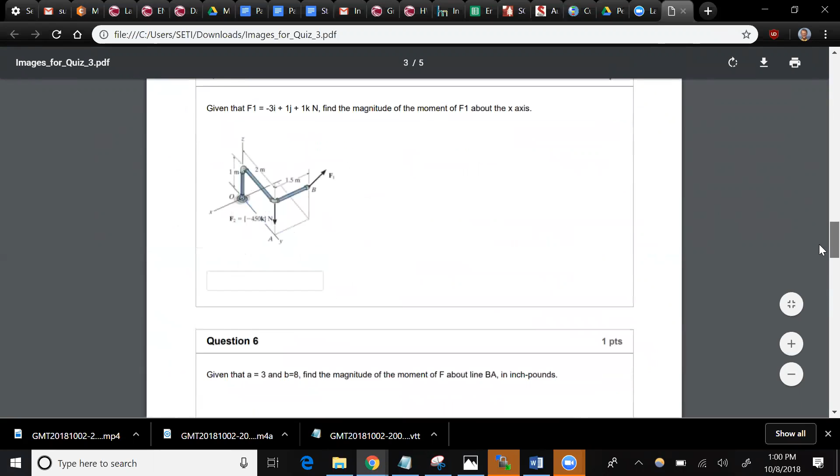So this is the email in your mailbox. Question. I don't want to give too much away because I want you to think about these things, right? But go ahead.

In the force vector, it's a j hat minus b k hat. Yes.

I got this answer by doing all the work just normally, and I marked it wrong, so I went back and checked it. I couldn't find what I did wrong. Okay, and I used a plus instead of a minus in the force vector, and it came out as the correct answer.

Right, yeah, weird. Yeah, that looks, the way it's drawn, it looks like A plus B, doesn't it? Maybe I interpret it as a plus.

Okay, well, anyway, do your best because I'll just fix that after the fact. Yeah, so don't worry about it. Do what you think is the right answer. And then if it gets marked wrong and you actually have the right answer, then I'll fix it.

So, yeah, these are the kind of things you should know, right? And this is one of those things that people usually forget about now, which is how to do the magnitude of a moment about a line. It's a complicated process, there's several steps involved. So go back and look that up.

Look at some of those problems that we did and try that. I'd rather not do that. If you want to work these as a group or something on the boards, that's fine. I just don't want to show you anymore because that doesn't really stick if I do that. So it's time for you guys to kind of dig in and find those answers.

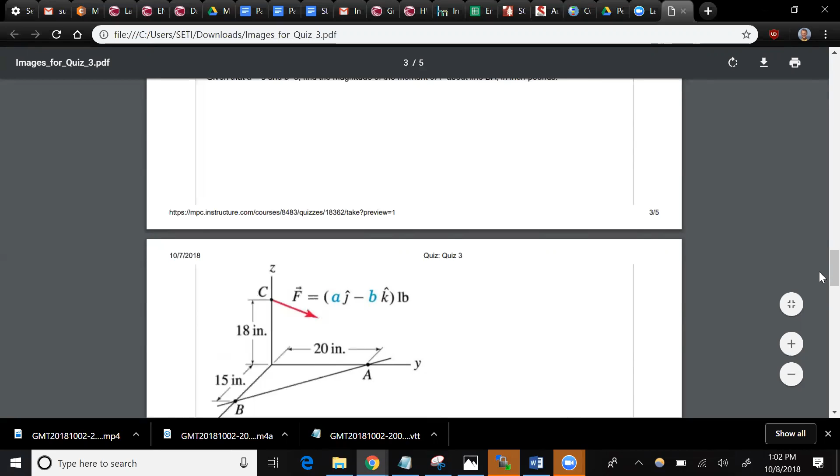Any other issues come up for anybody? No. Okay, then what are we going to do today? Today's review, it's a review led by you all. So there is a practice test. Did anybody not get the practice test?

So this is sort of what it looks like. There are 4 questions for practice test. That's the homework assignment.

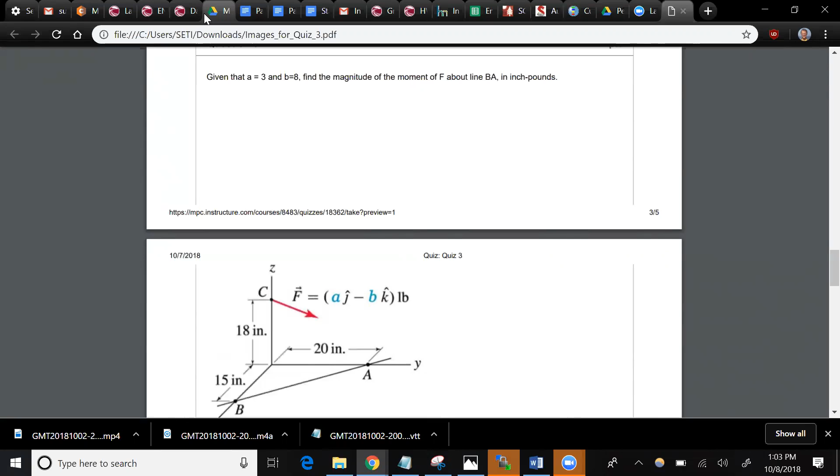And what would you like to do? Would you like to just work on them? Did you work on them and you have questions? It's really kind of open floor. Yeah.

Okay, yeah, we can also go over any homework problems. So for 150 from homework 6, I'm going to get that by going to my curriculum repository, which is right there. This was actually a test question once long ago.

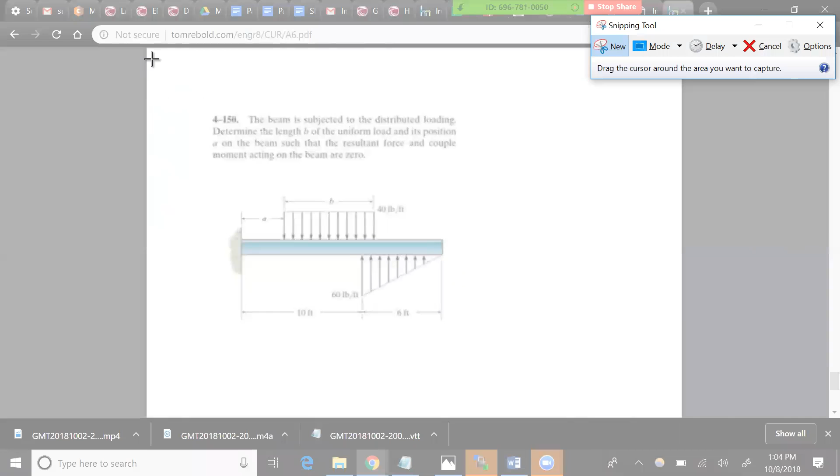Aziz, what was the, where were you finding difficulties? Finding the moment. Okay, so you want to share with me what part you were finding of?

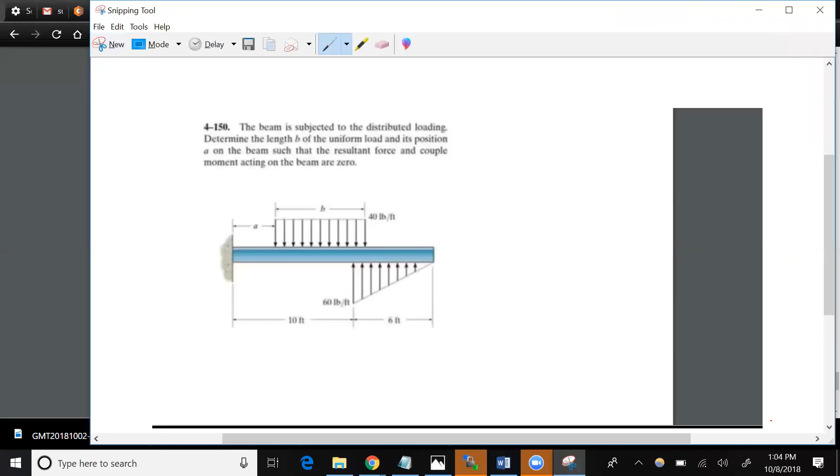So the force is -40 times b. That's what you're saying, right? Yeah, so for the rectangle anyway. So this is going to be 40b, right? Mm-hmm.

Well, if you had to tell me the location of where that equivalent force is for that distributed load in terms of A and B, what would you say?

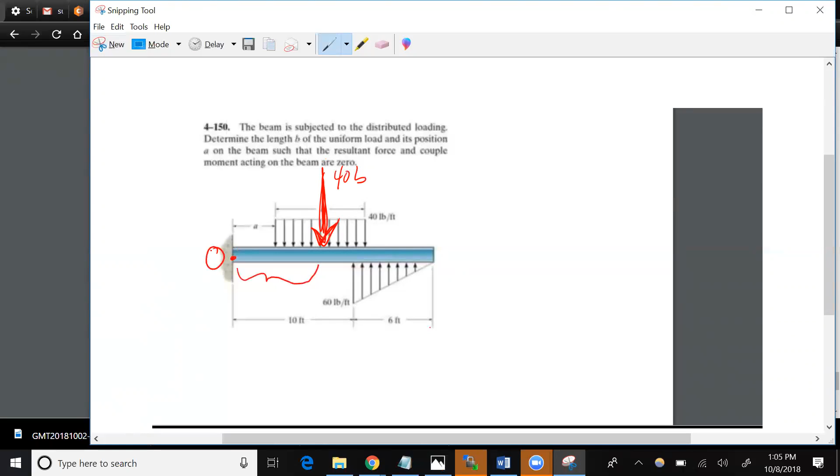It's kind of a number line thing, right? You want to know how far is that thing from point O here? How far is that 40-pound force, which is the equivalent force, well, 40 times B force, the equivalent force for that distributed load, how far is that from O? That's the moment arm, right?

Why do you say that? A little over 10 feet? 10 feet is the distance to the triangular load here.

All you know about that vertical load is that it has a width of B, and the left side of that vertical load is at A from O.

Yeah, you got to go all the way over by A amount, and then you got to go an extra B over 2 to get to the center of that rectangle, right? Yeah. That's how you do those. You're finding the moment arm. Yeah. Good.

Okay, any other questions? This is the kind of stuff that's great, when you have this like, oh, I get it now. That's what I want to hear, because that's when you get that, then it stays. Because now if that kind of thing happens again, you're like, oh, that's not a problem.

Any homework question on 3 through 6 is fair game, or any questions on the practice test?

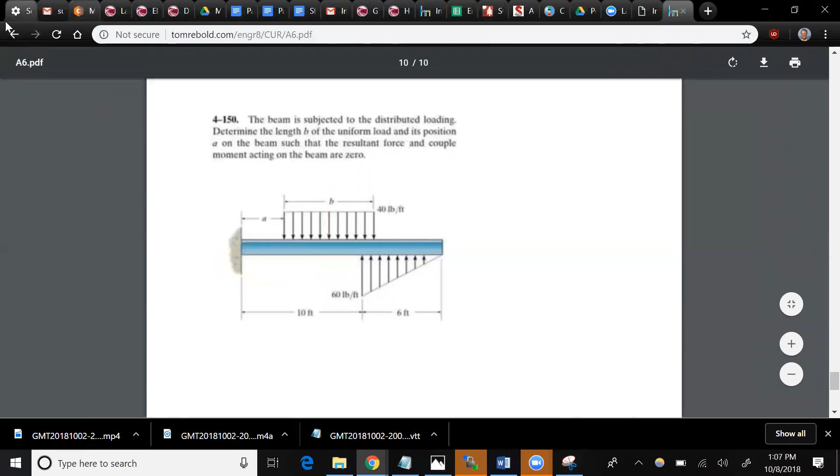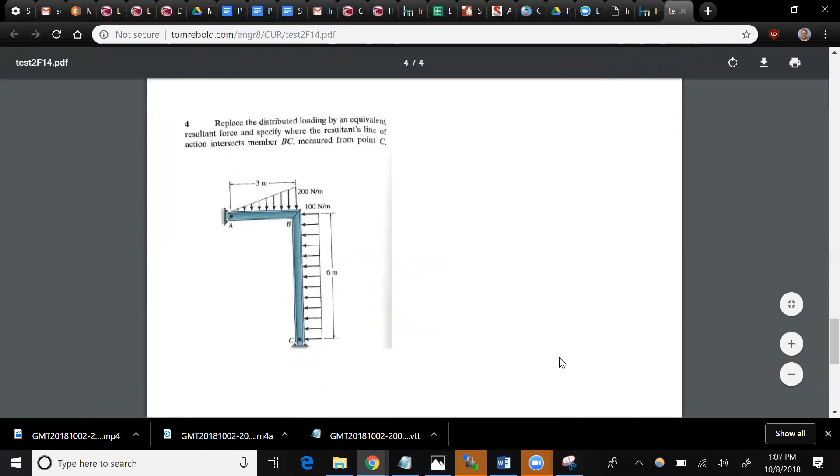Yeah, these are also rather complicated problems. This one is a complicated problem. It really is testing whether you got the concept down of what's going on here. This one also is a pretty complicated problem.

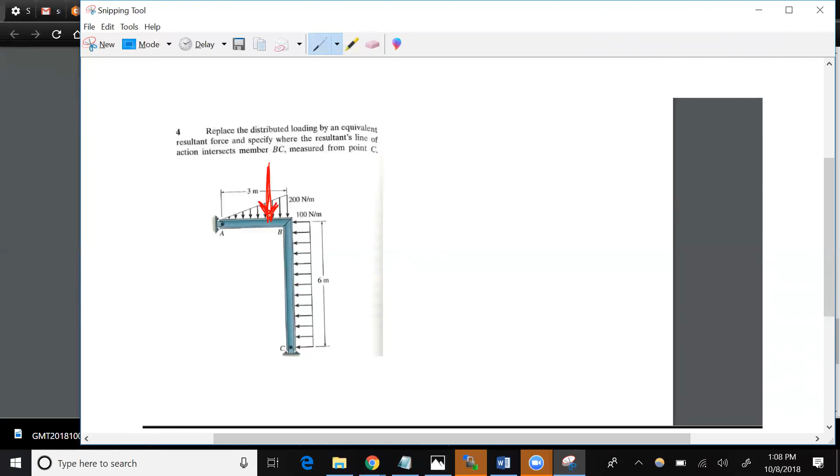What they're saying is that we're going to take those two distributed loads, one vertical, one horizontal, and replace it with a single force acting somewhere on that beam between B and C. If you just look at the net force, you can convince yourself there's going to be a downward net force acting on the top, and a leftward net force acting on the side. So if you add those two together, you get some kind of diagonal downward force, downward to the left.

And you can put that thing somewhere on the beam from B to C, and have an equivalent system, right? So you could take those forces and exchange them for a single force somewhere over here.

We have to tell where the resultant's line of action intersects member BC. So that resultant means you can get the same moment about C, if it's sometimes at different places.

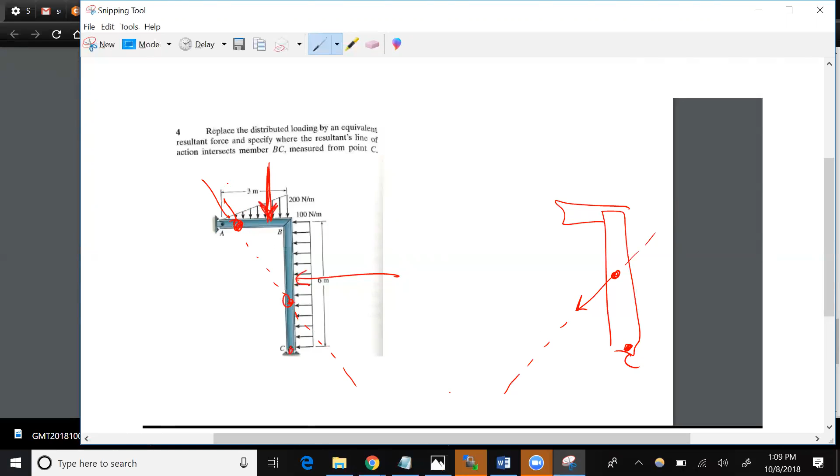So if the net force was going this way, you could place it here or here, and it would have the same net moment about point C. So sometimes I might ask you to put it on the horizontal part if it can actually work there. But in this case, the way the forces are pointing, the only place it's going to intersect the structure is on the BC beam.

So this is going to be our FR, and we have to figure out what is this distance, little d from C. It's going to give us the same moment as those distributed load forces are doing about point C, right? It has to be an equivalent system. So that's what's being asked.

Now, we've done a few of these, but how would you actually go about it? Does that answer your question, Trent, or do you want to actually see how to do it? Yeah. Good.

But for those who may not quite have it down, there's a lot of these problems - there's a conceptual part of understanding what the question's asking, and then there's a procedural part where you have to follow certain steps to get the answer, right?

So for those who are maybe not seeing that yet, and this might be a good exercise for everyone today if we run out of questions, is just to go through each problem and write a plan of how you would solve it.

Because it takes time to do all those computations. But if you have a good plan in your head, this is where you start, removing yourself from the nitty-gritty. As an engineer, when you get a problem, you start thinking in terms of plans to get the solution, not just start doing cross products and vector operations, right? You want a good plan before you start those, because it'll get you to the solution a lot more effectively.

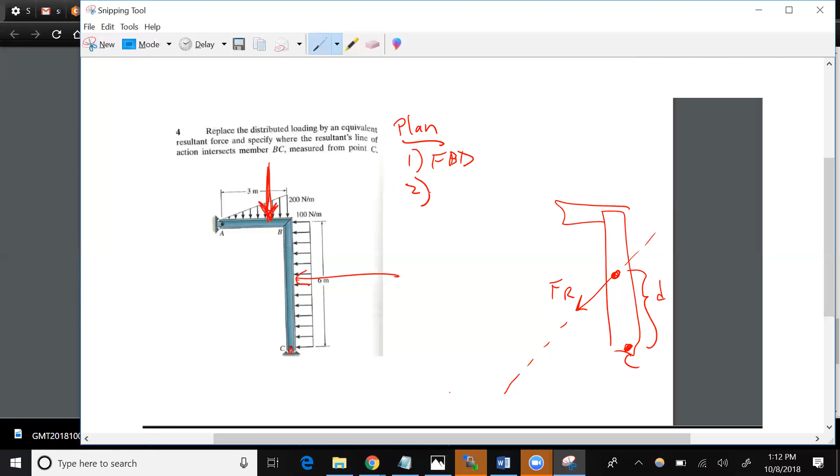Once you have a free body diagram, what would the next step be? Find the FR for the triangular load.

I like drawing little triangles there. Oops, the triangle's going the wrong way. You can find the net F for the triangular load, right? That's a distributed load, that's the area of that triangle, right?

And you can find X, where that triangle is going to actually, where that effective force of that distributed load is going to be, right? And you can do the same thing for the rectangular load.

And call that Y rectangle, where maybe this is the, I don't know how we're going to actually locate these things, but what would be a good reference point for X triangle and Y rectangle?

X relative to what? There's no XY axis on it. Where should we put the origin of our XY axis? How about it's C, right?

Because that's where we're going to have to find that distance relative to point C, right? So why don't we put our axis right here? All right, so then this would be our distance here.

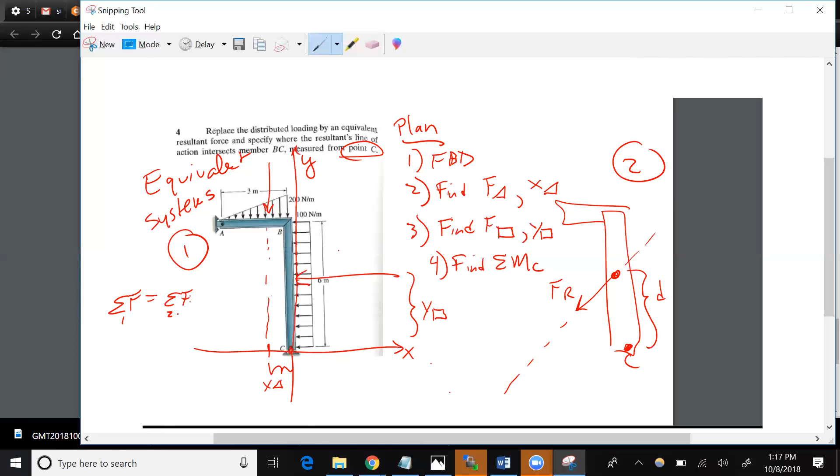In order for them to be equivalent systems, what has to be true is that the sum of the forces in system 1 has to equal the sum of the forces in system 2, and the sum of the moments in system 1 has to equal the sum of the moments in system 2. That's the kind of problem that we're trying to solve here.

We got to get those to the equivalent system. And we just found the sum of the moments about C, and this is actually in system 1, right?

Now we got to find the sum of the moments in system 2. There's one unknown in system 2, though, right? We know what is the horizontal component of Fr equal to?

Well, more generally, according to our plan here, what is the horizontal component of Fr equal to? We already figured it out. What is the horizontal component? On our plan, what are we calling it?

F rectangle, right? So this is F rectangle. And then what's the vertical component of that force? F triangle, right?

So this one, step 5 is going to be, all right, I'm kind of going to move this down. I think I'm going to move this down here because I'm running out of space here. Step 5 is going to be find the sum of the moments about C in system 2.

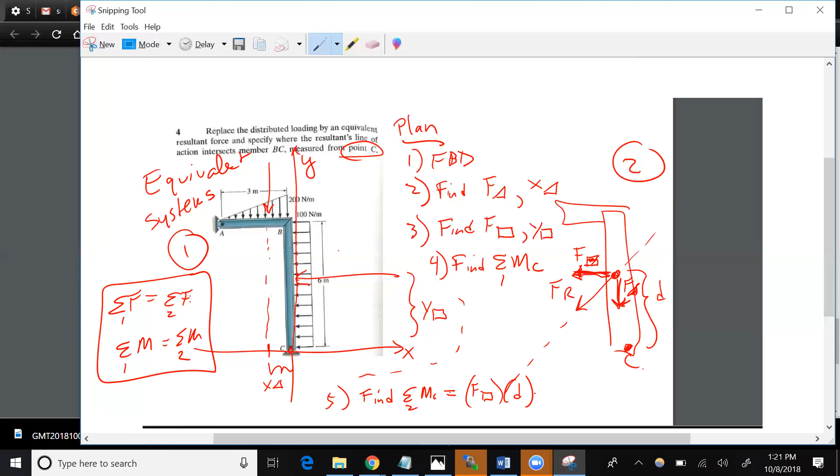And then step 6 is going to be, solve for D.

Any other questions on that one? That's a good one. You see, a lot of these questions now have a lot of stuff buried in there - multiple steps, multiple concepts involved.

Any questions on another problem you want to look at?

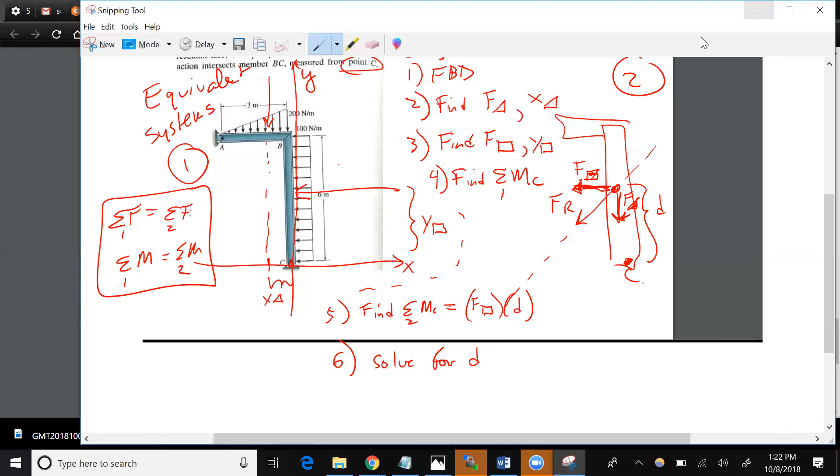Can you go over number 2 for the assembly? Sure.

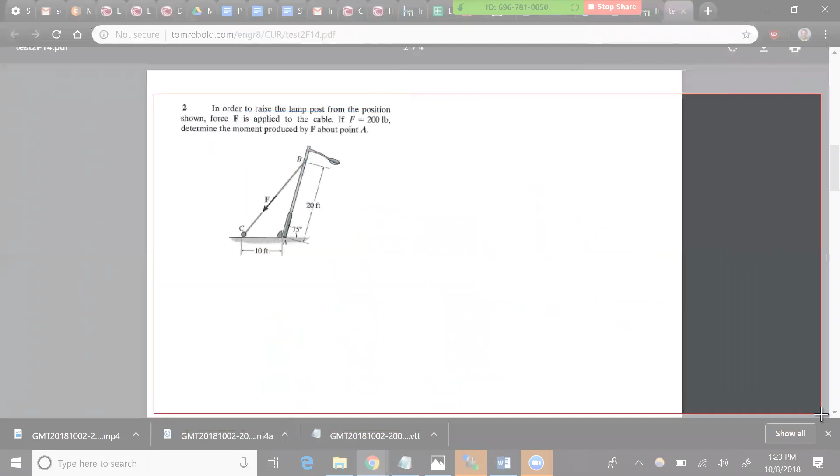In order to raise a lamppost, force F is applied to the cable. F is 200 pounds. Determine the moment produced by F about point A. So what are we trying to find here? The moment of F about point A, right?

Yeah, this has quite a few pieces to it as well. It's not just cranking through some stuff. What do we got to do here? What do you see that needs to be done? What do we got to figure out before we can do anything?

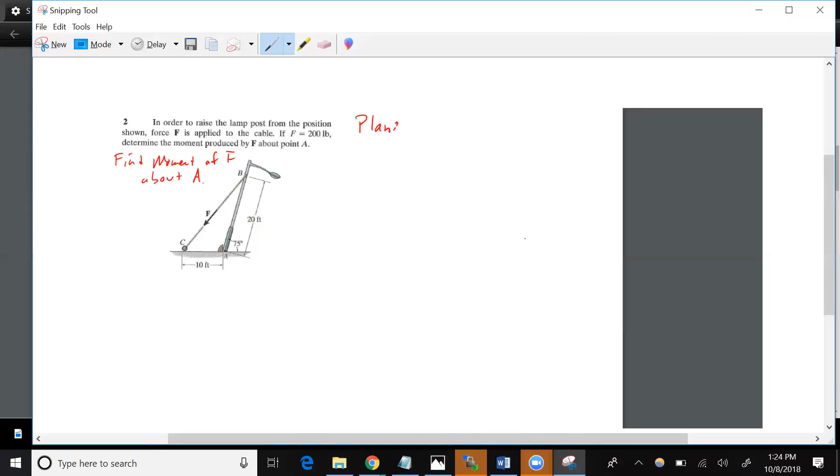Finding the moment arm with F. Sometimes the plan can initially be kind of like brainstorming, so some of the thoughts are: we got to find the moment arm for F. What else comes to mind? Find angles at B or C. What else comes to mind? Brainstorming - throw out some ideas.

No, no, don't bring in the law of cosines. No, go away. If you like the law of cosines, you can use that, but I removed the law of cosines. I used to bring in law of cosines back in chapter 2 - they have a section on how to use that, but it's so annoyingly obtuse when you could just use Cartesian vectors and stuff.

No, there's something really important that no one said yet that we got to do first. What do we got to do? Position vector, right? What position vector? Yeah, you got to find R, B, C.

Then what? Yeah, unit vector, U B C. And from there, that will give you the Cartesian vector for F, right? You need that.

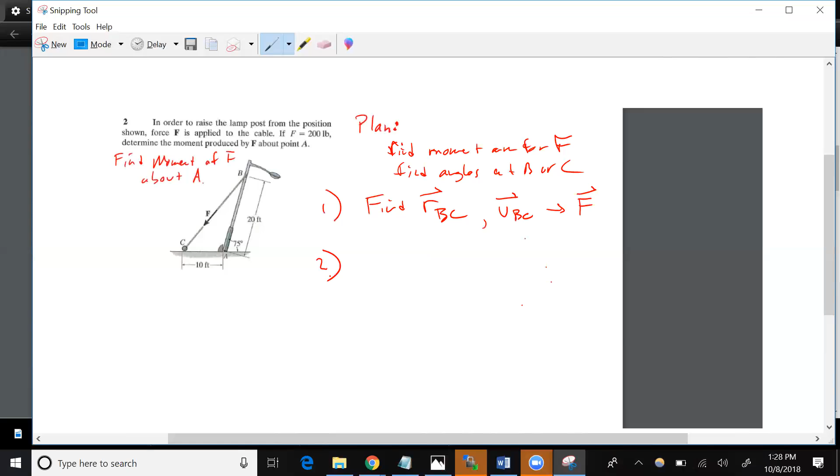And remember, when we're doing moments, even with 3D moments, you can do the moments using 2D or 3D - you can do vector analysis or scalar analysis. So you can decide, and maybe we can do this since we have F as a vector - we can call this X, Y, and the Z-axis could be coming up out of the page. Let's put the Y up here, sorry.

If we're going to do scalar moments, how would we solve this with scalar moments? The moment of that force about point A.

Corey, what are you thinking? Find the length of BC. Well, you would find the length of BC as part of finding UBC, because UBC is RBC over the magnitude. But that's not going to give you the moment. Let's assume that we got that already, and all that gave us is a Cartesian form for F.

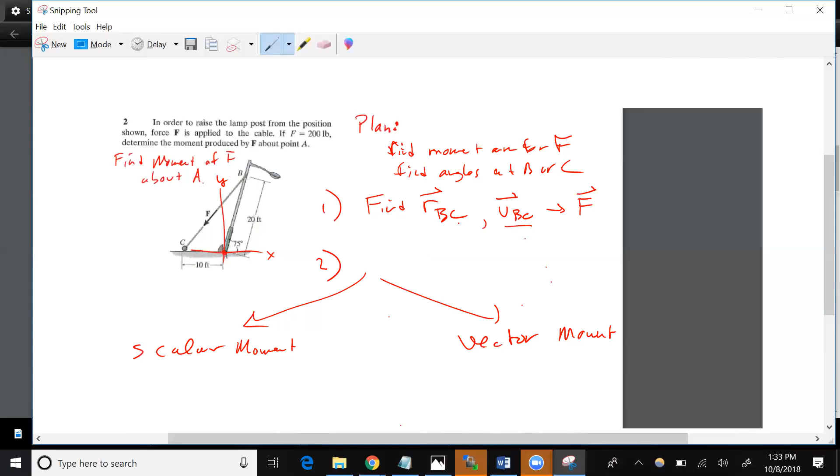For instance, you know how moments work. What's the definition of a moment using vector notation? M equals R cross F.

If you've got F as a vector—and this only works, by the way, in 3D—you might have just had a two-dimensional F here, but you have to add a third component for F, which is going to be 0. The Z component of F is going to be 0, right? So F is going to equal some Fx, Fy, and 0. Or whatever notation you like: Fxi plus Fyj plus 0k.

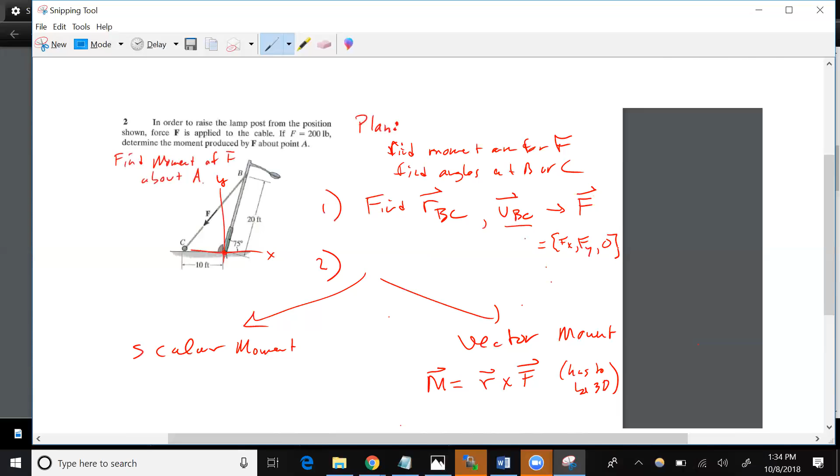And what's R going to be? Well, R AB, or more easily, R AC, even more easy, right? So R could be R AB, in which case you got to do a little trig there: 20 times the cosine of 75 i plus 20 times the sine of 75 j, plus 0k again. Or it could be R AC.

Remember the principle of transmissibility: that force is going to have the same moment. You do the moment arm AB, do the moment arm AC, those are going to give you the same answer. And that is just that cross product, which is a determinant—maybe the law of sines is going to be a little less intimidating if you don't like those kinds of operations, since it's easy to mess up a determinant. But that is a viable way to go, and it didn't require any trig except the trig needed to find the x and y for point B.

If you're going to use point B—because you don't even have to, you could just use point C, and that would be real easy. So that's one way. Now, the other thing is, if we're going to use scalar moments, how would we use it? Do it using scalar moments.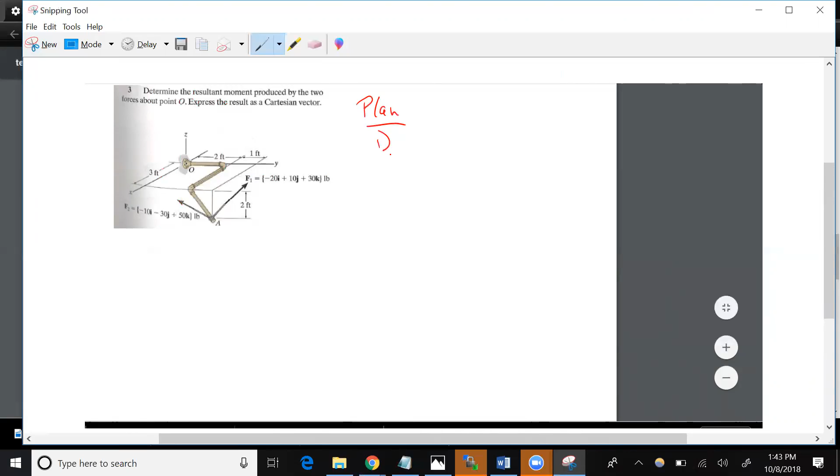Yeah, you could save some time by adding. That's the opposite of the principle of moments, right? Instead of having 2 forces and doing 2 separate moments then adding the moments together, why don't you just add the forces together first and then do the single moment? That only works because the two forces are attached to the same point.

Step 2: well, you want to find ROA, right? And step 3 is going to be MO equals R cross F. Yep, okay.

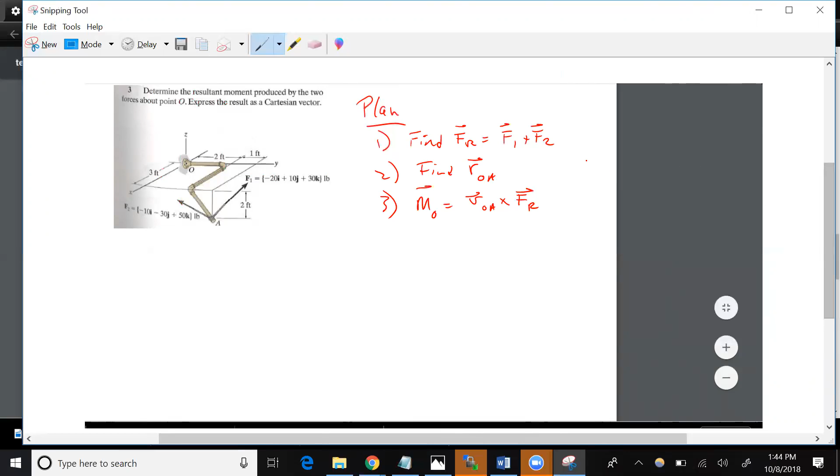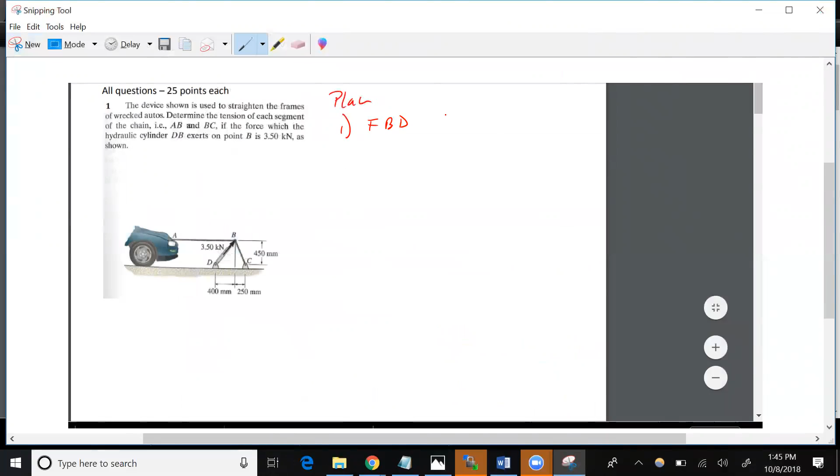Six more minutes. The first one, this one, this one is an equilibrium problem. So you should probably start off with this one with what? Yeah, free body diagram. Well, of what? Point B, the only point, it's a concurrent system, right? You're just going to free body diagram all the forces acting on point B.

What are they? TBA, TBC, and FBD, FDB, which is 3.5 kilo. There is a problem still we have to kind of resolve here.

What do we have to add to this diagram before we can write the equations of equilibrium? What do we got to do? Angles would be helpful. Triangles, angles, right? We're going to figure out what angle this is. We can't really write those equations unless we know what those angles are. So, you know, that is a question.

And I guess I wish I had made that bigger now. Let me move this away a little bit. And it looks like it's not exactly, it's definitely not an equilateral triangle.

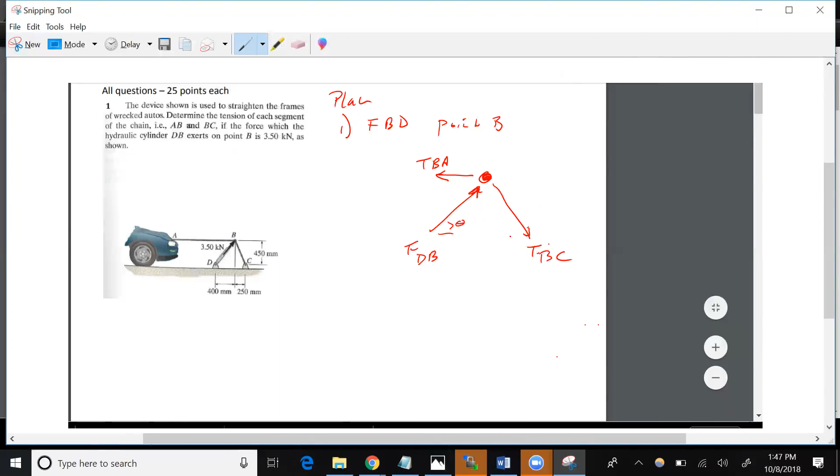So what would this angle theta be, or this angle phi be? That could be part of your free body diagram: find theta and phi. Yeah, let's not go into that, that's something you could kind of noodle through. But then suppose you found theta and phi, what would you then do?

Sum of Fx equals 0, sum of Fy equals 0. And please write those on your solutions so I can see what your thought process is. Don't just write the equations. Sum Fx equals 0, and then continue that.

And then basically solve, right? Solve for the two unknowns. There's only two unknowns there.

For TBC, sorry, TBA. TBA and TBC - those are the plans, and if you haven't done it yet, you could sit down and execute those plans, and then check your answers.

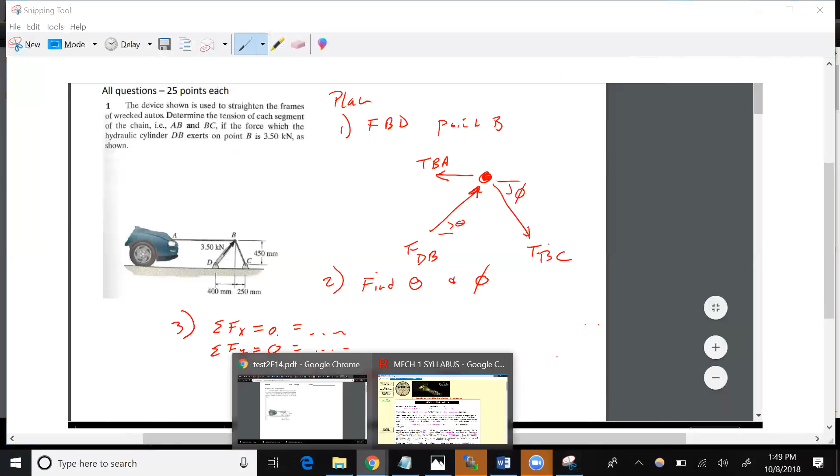The solutions are available on Canvas if you go to the test link. Test 2 link, sorry, I'm getting ahead of myself. If you go to the test 2 link, this is the practice test, and these are the solutions.

Yep, question? I just want to look at problem 4-11 from the homework. From today's homework? It was from Homework 6? This, I think it was 5 - it's the homework with the mobile one. Yeah, it's 4. Assignment 4? Yeah, and which problem?

It's not on this list here. Oh, okay, maybe I just didn't. No, it's on homework 5. I just want to compare that one with...

...the practice test that we just looked at, to compare why we crossed this one with ROA for problem 4-11. For this one, we did ROA, but it's like we're making the vector to the point where the force is acting. For this one, we didn't do it to ROB - we didn't use ROB and cross it with the force.